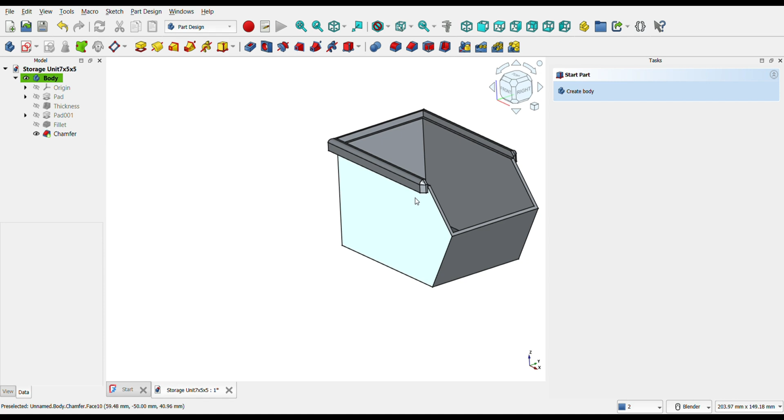Today, I'll show you how to design this stackable storage box in FreeCAD, step by step. Perfect for total beginners. Let's jump in. If you're learning FreeCAD for 3D printing or Arduino projects, this is the perfect place to start.

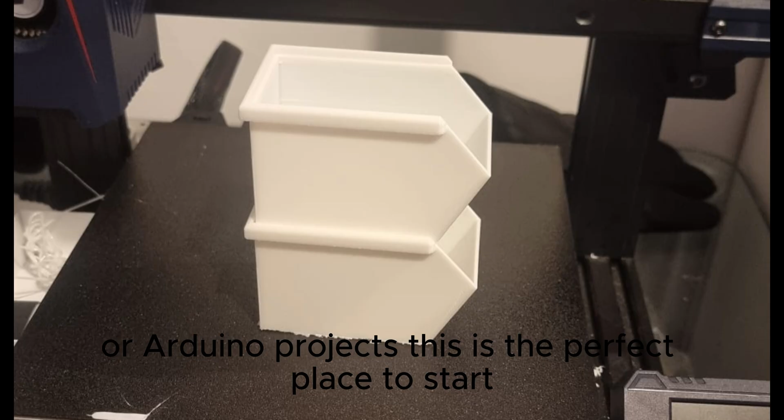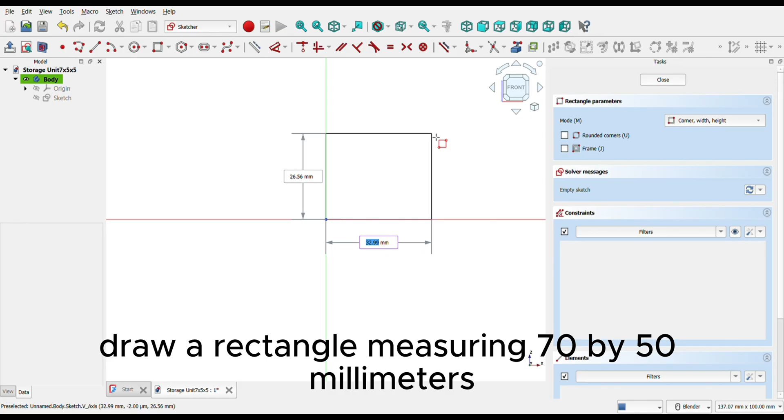Start by creating a new body, then open a new sketch. Move the cursor to the origin. When you see the small cross, click to start. Draw a rectangle measuring 70 by 50 millimeters. FreeCAD automatically constrains it, so the profile is fully constrained.

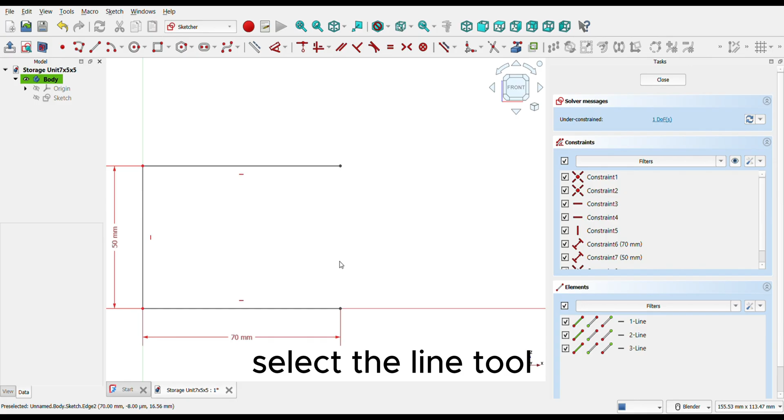Delete the right vertical line to create space for the opening. Select the line tool and draw a 35 millimeter line at a 60-degree angle. Then connect the remaining points to close the shape.

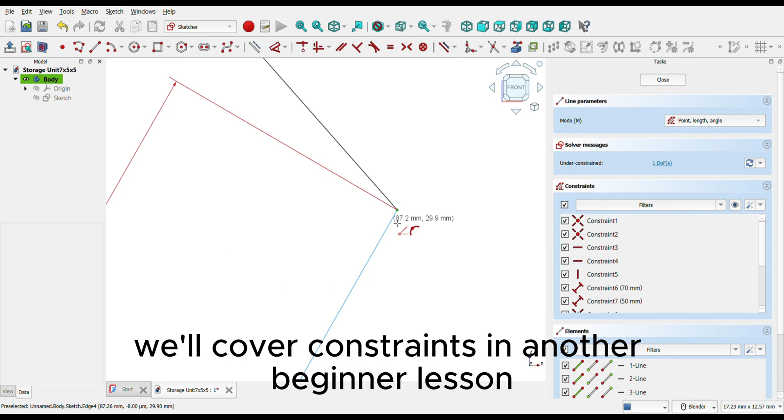The sketch is not fully constrained anymore, and that's okay. We'll cover constraints in another beginner lesson. Close the sketch, click Pad, and extrude it to 50 millimeters.

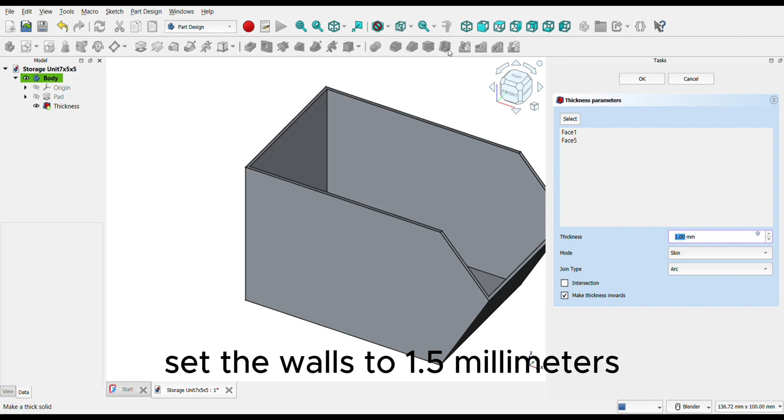Select the top of the box and open the thickness tool. Set the walls to 1.5 millimeters. Your storage unit is now hollow.

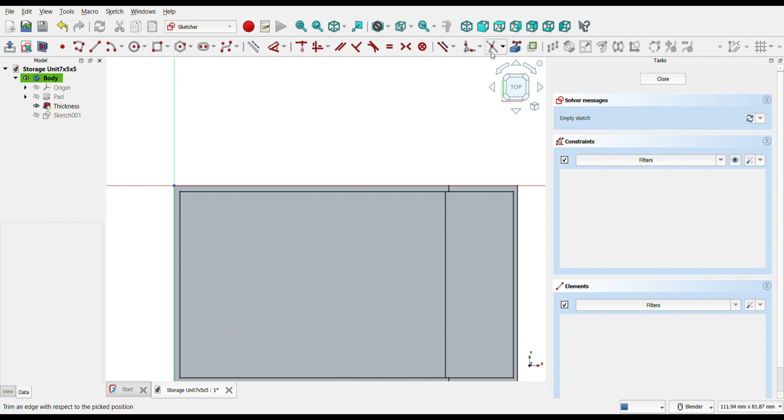To make it stackable, select the top face and start a new sketch. Click the external geometry tool and select all outer edges. They turn pink. These will be our reference lines.

Create two rectangles on the sides, each 70 by 3 millimeters, starting from the corners.

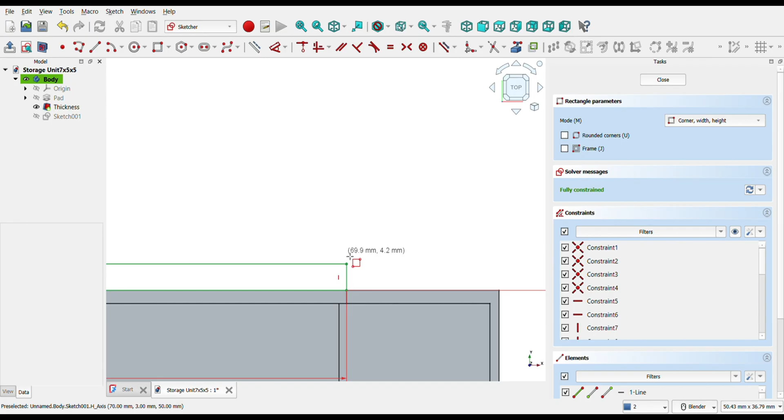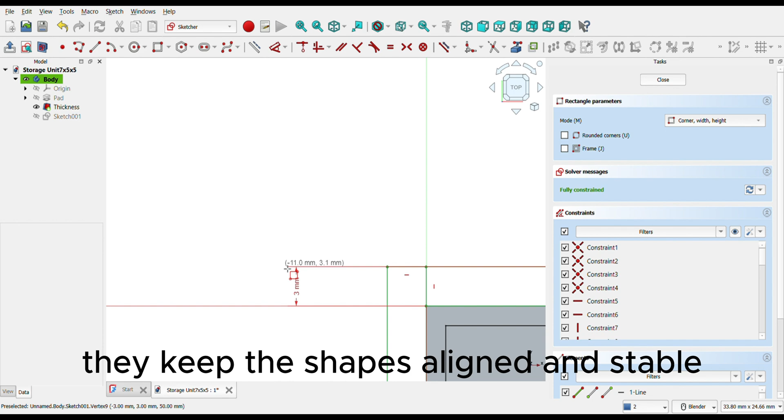Now add one more rectangle at the back. Everything snaps thanks to the external geometry. The symbols you see on the sketch are constraints: horizontal, vertical, coincidence, and length constraints. They keep the shapes aligned and stable. We'll cover them in detail in another video.

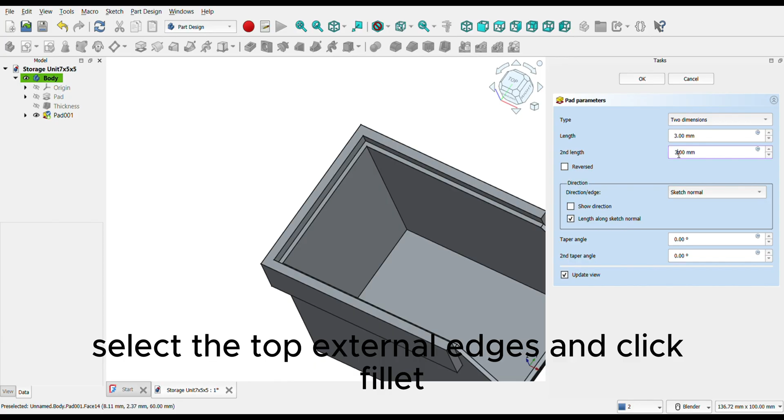Close the sketch, click Pad, choose 2 dimensions, and set both sides to 3 millimeters. Select the top external edges and click Fillet. Set it to 2 millimeters. You'll see the shape instantly smooth out.

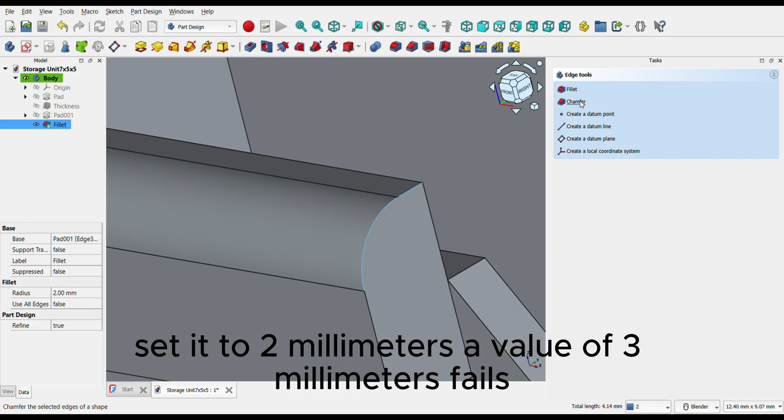Select the 2 front edges and click Chamfer. Set it to 2 millimeters. A value of 3 millimeters fails, and 2.5 doesn't look good, so keep it at 2 millimeters.

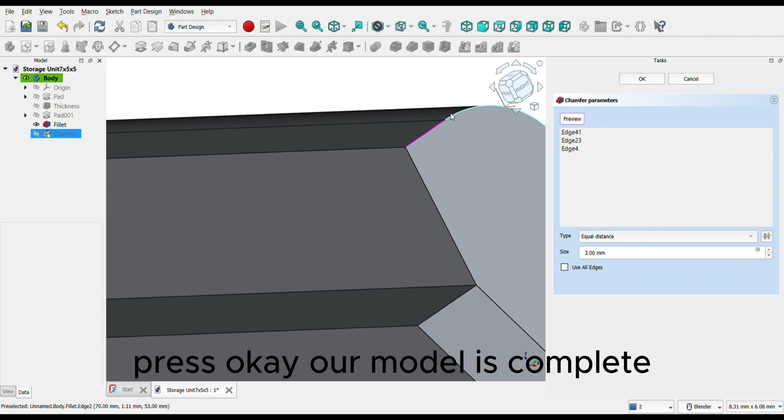Click Chamfer again. Then in the sidebar, click Select. Pick the 2 matching edges. FreeCAD automatically applies chamfering to the remaining edges. Press OK. Our model is complete.

Select the body, go to File, Export, and choose STL. This format is ready for 3D printing. Load the STL into Anycubic Slicer. Here are good beginner settings.

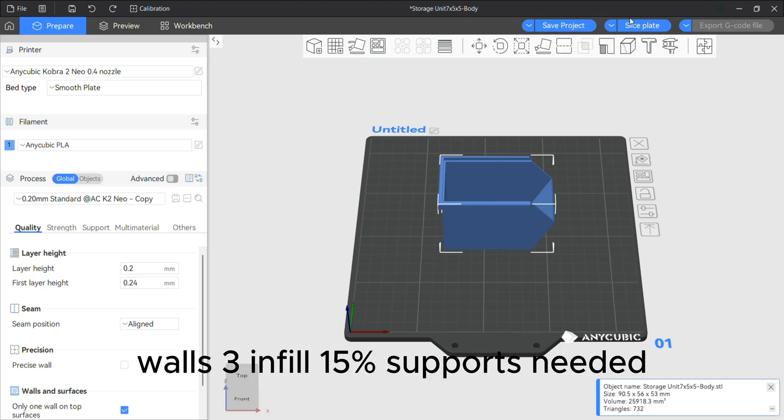Layer height, 0.2 millimeters; walls, 3; infill, 15%; supports, needed; brim, optional. Slice it, and your first FreeCAD design is ready to print.